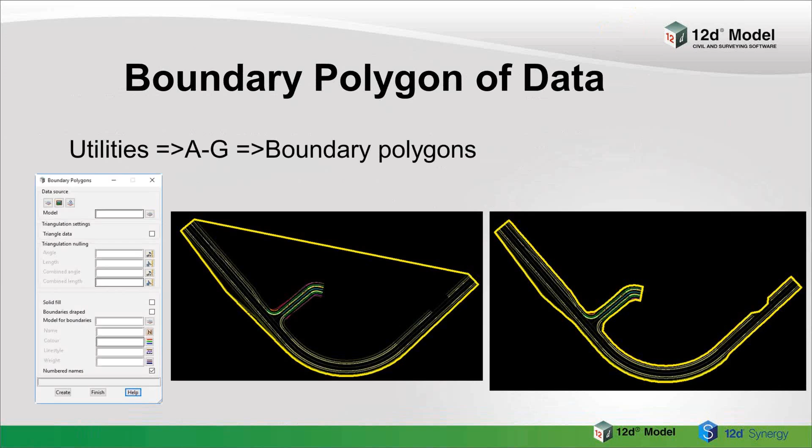A very important thing with high resolution screens and tablets is being able to blow up your icons so they're much larger. Out in the field, you want them so you can hit them with your finger, because if they're too small, you can't differentiate. But the problem on high resolution, like 4K monitors, is everything then is much, much smaller, so you might not be able to see or read it.

We've set these things separately, so you can blow up the icons on your views separately to the icons in toolbars, and we can also blow up the icons and text on your panels. So they're independent, because some of you may want larger, but maybe not all of them. Now you can make settings, so there's an example there on the views, and they can be totally independent to say things on the CAD toolbar.

With dimensions and leaders, which were introduced in version 11, you can now have overrides, so you don't have to make lots of different styles. For a given style you've defined, there are various things in it, and you can then say override, maybe the color of something, maybe the text used in it. So you can use the one style, but apply these overrides, instead of needing a totally new style. These can be set on menus and toolbars with overrides, which will make it much easier in terms of how many styles you need for dimensions and leaders.

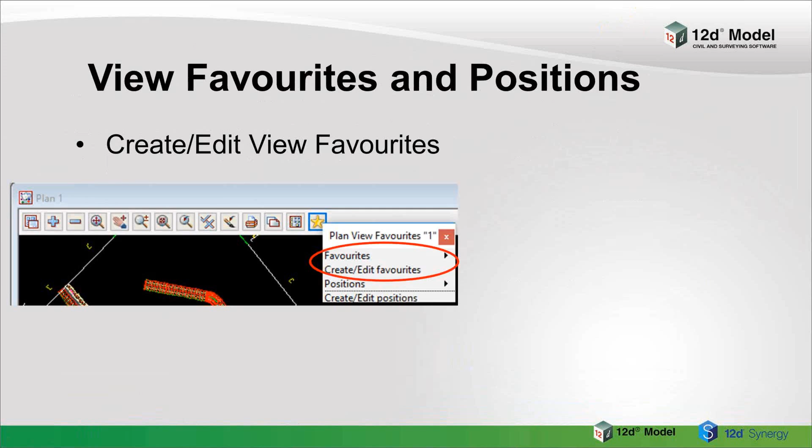A small thing I'll mention here is something we call view favorites and view positions, which I think you'll find very handy. You'll see a little yellow star now in version 12 on all your views, and if you click on that, it'll come up with favorites and create edit favorites. If you pick on it, it actually comes up with the same information that you have when you look at all the settings on your view.

You'll see little ticks on the left-hand side. You can tick them on so these will be used, or if it's ticked off, they'll be ignored. You can take all these values and write them away to a file, which we call a view favorites file. There's a different one for plan views, section views, and perspective views, because they're all different types of information, but the plan and the plan OpenGL share the same one, and similarly the perspective OpenGL share the same one.

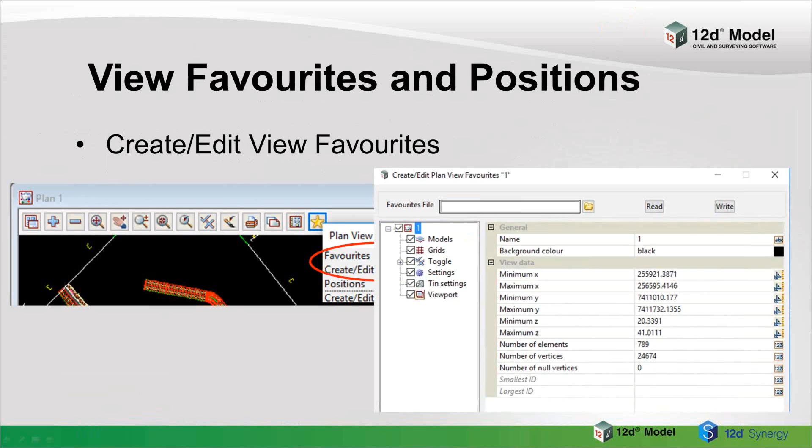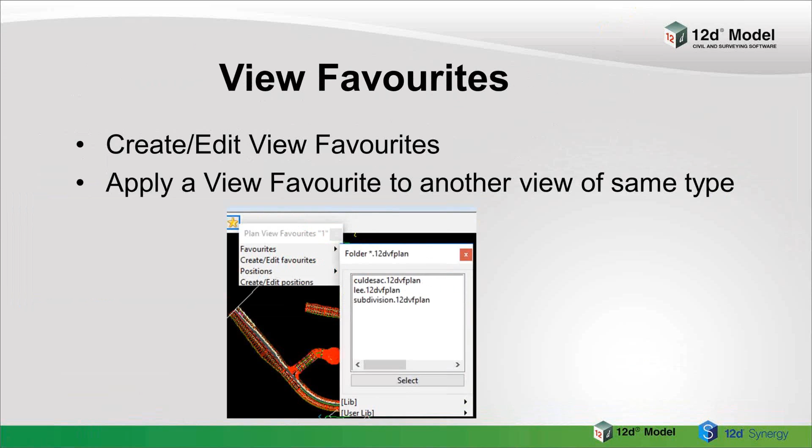Once this has been written away, you can then apply it to another view. You pop up the list, and when you apply it to the view, it'll add all those models or settings to that view. You're also able to say use them when you create a new view, and there's a list of models to add and remove—you can say remove them first before adding new ones, so there's quite a bit of flexibility. If it's a new view, you don't have to remove any models, but it takes all the others on, so you can create a new view straight away and give it the information.

You just feed it a new plan view and give it the favorites file. So all your settings that you ever want can be set up first in the favorites file, then applied to a new view or an existing view. When you create a new view in a chain, you can also use the favorites there, and similarly when creating a new view in a macro, you can give it a favorites file. So basically you can set all these things up with your favorites to get things exactly how you want them.

In fact, when a new project starts up, there's a file that's run which runs macros and chains. If you had all the new views you wanted, you could have them in there with the favorites, so they'll come back exactly as you want, and you don't have to sit there toggling things on and off. You also can use them in plot frames—a plot frame can now have all information that wasn't stored before saved in a favorite, so you can plot a plot frame without having to have a view. Those can be made and put in a chain, just like with long sections and cross-section plots, where you could run those without having to do anything—you could just run them. So you'll be able to do the same with plot frames.

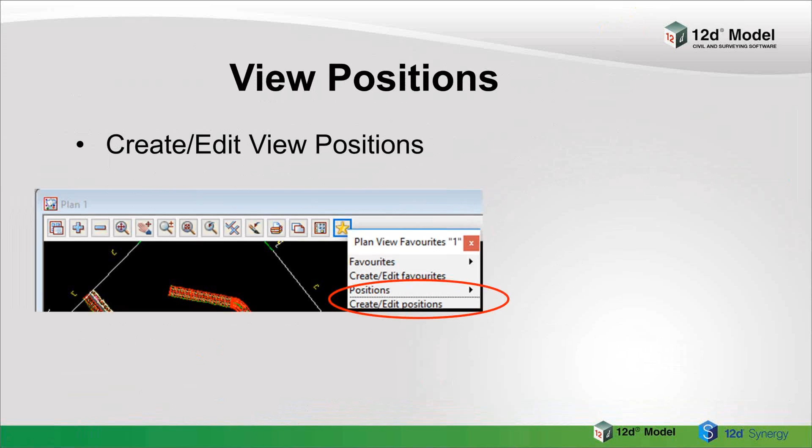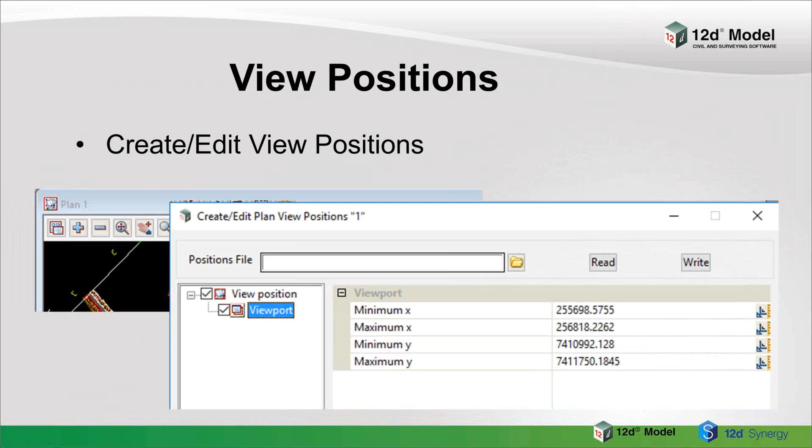Once you've got them, they have this viewport information, and you can apply it to an existing view of the same type. Very simple to do - you can just click one you've got there, and that'll zoom in, or however the settings were for viewing that view. Very good in perspective views, where you can have lots of different eyes and targets you're looking for.

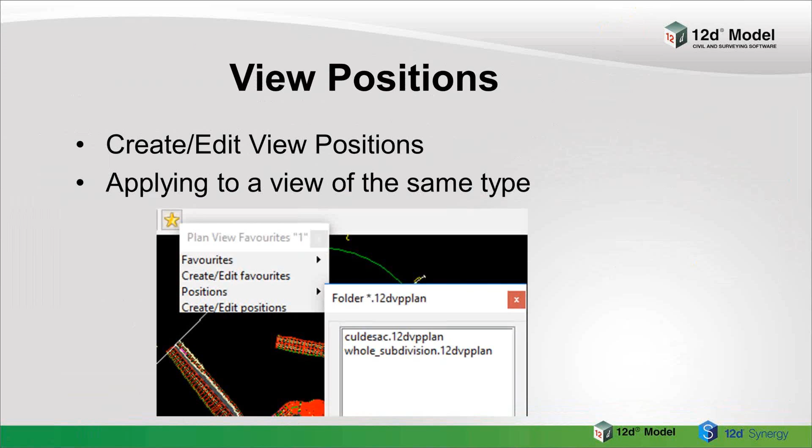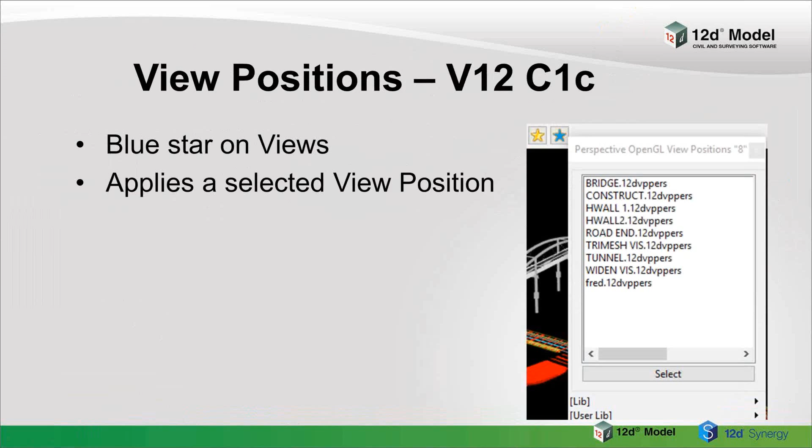Now in version 12, actually it's in C1c, there's going to be a blue star on there as well on views. So you not only have the favorites, which is the yellow star, there's also a blue star. What that does is give you a list of view positions, so it's nice and quick. If you've got your view positions set up, you just click on that blue star and pick one from the list, and it'll take you to that position.

The attribute manipulator - this is something that was going to be only in 12, but we brought it out early in V11 C1H and above. Not everything - we've extended it quite a bit for version 12 - but people were needing to do a lot of attribute manipulation for BIM and other things earlier on.

So basically in 12 it works with string, vertex, segment, and segment attributes and properties. You can do things like take your segment properties and map them back to string properties, because a lot of systems can't have vertex and segment attributes. So what you can do is say take something on vertex 3 and map it, and you might give it a name with a 3 in it. You can do that automatically so you know which vertex it came from, and the same with the segment. So it gives you a way of getting that information onto a string where a lot of other systems do not have vertex and segment attributes.

And you can come the other way - backwards. You can come from that information on string attributes and turn them into vertex and segment attributes. There's a lot more properties and things - string properties like areas, length, 2D length, 3D length - those have been extended quite a bit. Information you can get from your strings and turn them into attributes, which you may want to use somewhere else or with another package.

So if you haven't used the attribute manipulator, it's a fantastic thing. It also now works with model and project attributes, so they can be used as well, because it's a two-way thing too. You can take information, make string and vertex and segment and properties out of it, and go the opposite direction. So it can create, delete, and manipulate attributes and properties.

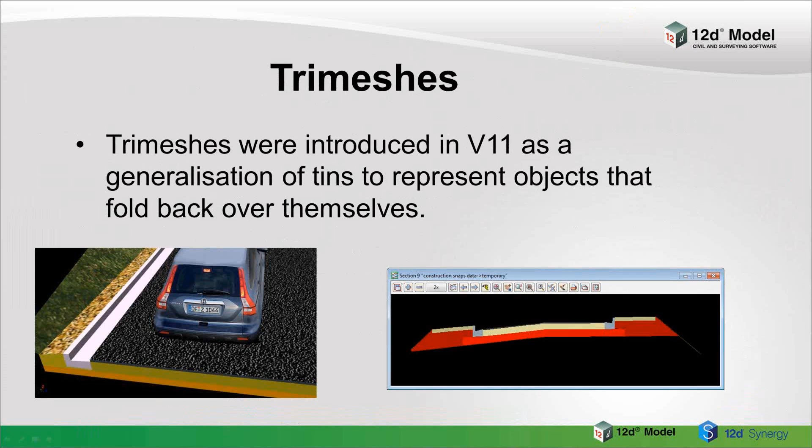And when you cut through these, you then see them as solids. So that's what Trimeshes were about. They were in version 11, but we just kept adding new things for version 12.

So the colors, a lot of things now that weren't working for them work. The color box, you convert Trimeshes, they can keep the string attributes of the things that had it. The global delete and rename now work for Trimeshes.

Helmert transformation works on Trimeshes, the 2D and 3D, because what happens, you often get data that's come in from another system as Trimeshes, and they'll be in some strange 0-0 coordinate system. By using the 3D Helmert, which basically is a rotation and a translation in 3D, you can then place it where it should be in proper, say, MGA coordinates.

So if you don't realize, Helmerts are basically how you take information as a 2D and a 3D. It'll scale, rotate, translate, to take information really from one coordinate system into the one that you want.

You can set now the colors of individual triangles in the Trimesh, and you can have vertex and segment information in the Trimesh. A lot of people don't have this information. When we do an apply menu and we create a Trimesh, we actually can give the edges that have come from strings the names of those strings. And also we can put information on the vertices.

So when people take it out to the field to set out with 12D field, they can pick things in the Trimesh. You can pick a string to set out from the Trimesh. You don't have to have the strings as well. So it has all that information in one neat package.

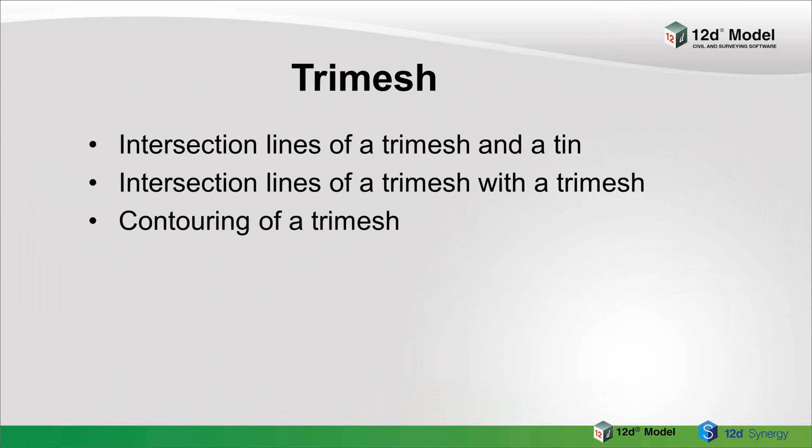So again, we keep adding extra things in for you, and people can make up Trimeshes from what we call planar polygons. A planar polygon is just a polygon with not many sides. It has to be a simple one - it can't cross over itself, it can't have duplicate sides and things like that. So it's a simple polygon, but it's in the plane, meaning all the values lie in the one plane.

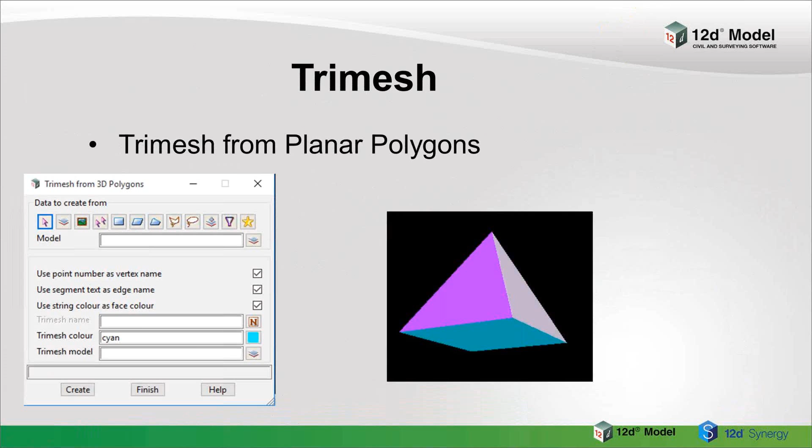And if you basically have a number of these things that match up the various edges, you can use the Trimesh from 3D polygons, and it'll create a Trimesh for you from it. In the same example here, you can even keep the colors of the various polygons. In this case, it's got a purple face because that particular planar polygon was that color, and the cyan one is the base. Very useful for building up Trimeshes from other data.

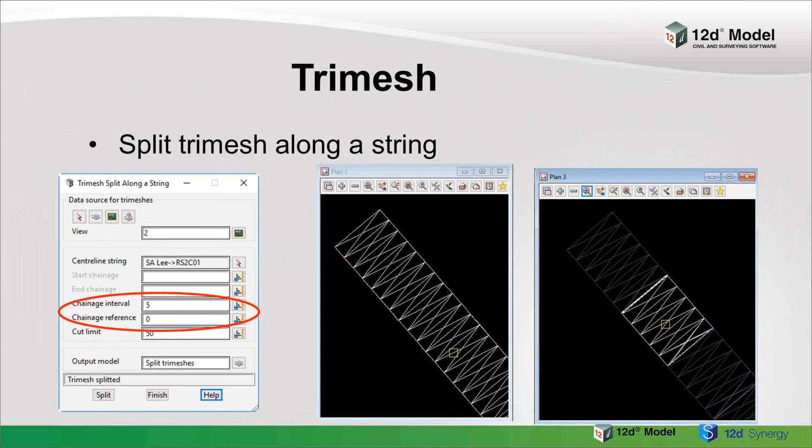You can split a Trimesh along a string. What this is all about - you've got a long Trimesh, it might be a road that goes for a couple of kilometres in pavement, and what this will do is you can then break it up. We do get some people in BIM systems asking, yes, we've got the pavement, but we want to break it up into 100-metre lots. So it's quite easy to do - it just splits it for you into individual Trimeshes. Very, very handy option, very hard to do in most other packages.

So Trimeshes are now a fundamental part of 12d Model, and you'll see this was a slide from the conference. We saw them used all through the conference in snippets and all sorts of places. So you'll see in a lot of our videos that we're always producing Trimeshes.

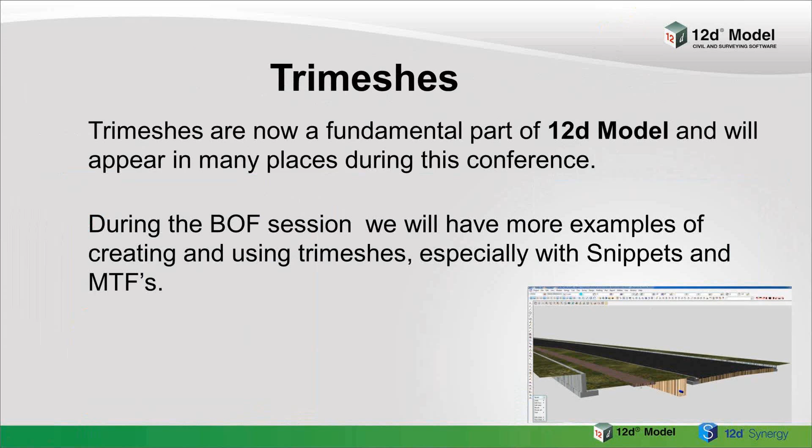The other big thing that's happened is this BIM, which, as I mentioned before, at the beginning of the year, it was a vagary. People said, oh, we want a BIM model. And you'd say, what do you mean? Most people had no idea - it was just some vagary, they've been told they need BIM. But it's stayed in now, and people are starting to read ahead.

BIM came into the UK, where it's mandated. A lot of people then were saying, oh well, we want a Revit file, we want a DGN or DWG. Well, if you read a bit further down in the UK system, that's exactly what they don't want for BIM. The whole idea about BIM is to use a format that's published so everybody can read and write it - getting away from vendors locking you into proprietary systems. So people are starting to realise that. As much as they're talking about BIM, they didn't read the next chapter of where the UK is going, saying you've got to have interoperability between different software vendors.

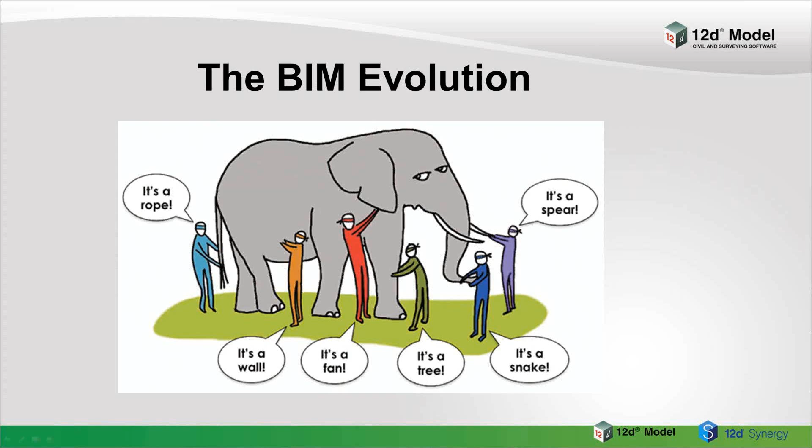So that's a good thing about BIM - people are finally understanding what it's all about. So that was all where it came from, being software vendor neutral, and you needed some sort of open format.

Strangely enough, 3D visualization was not always required. It was more the attributes and the metadata which a lot of people wanted. But in our world, with buildings and things, they seem to be concentrating on wanting the 3D representation. That's no problem, it's in there as well, but it's not necessarily what the end users are often after. And that's where the attribute manipulator comes in, to allow you to pass a lot of extra data across as attributes into your BIM data.

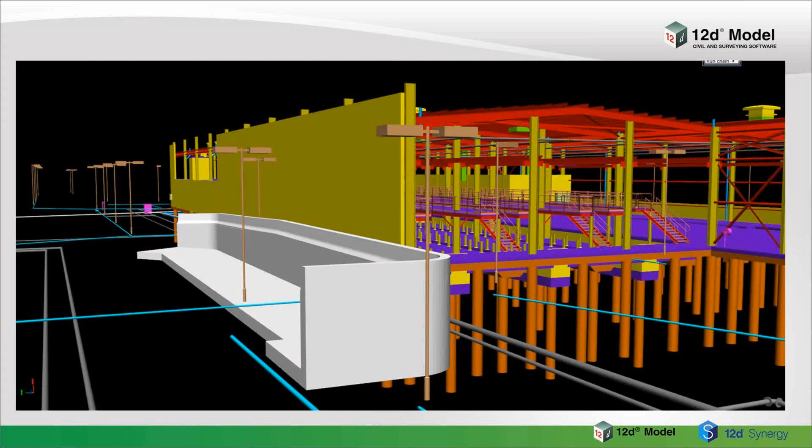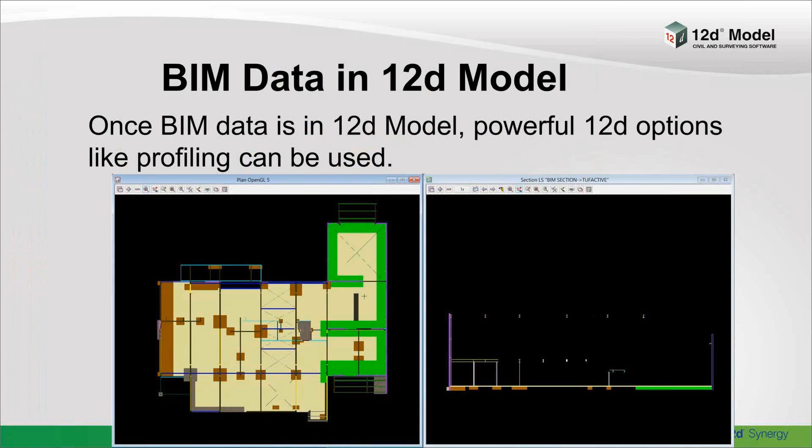And of course, once it's in there, you've got all your other 12D options, like there was the house, but we can then profile it - not just sections along a cross-section, but along the whole string, sectioning along a string, which a lot of packages can't do. So all our power, once the data is in 12D, we can use all our options on it.

So basically, we've now put a lot of these under a BIM menu. They're there in all sorts of guises, but they've now got them in one spot, and we left them in the other places as well. So you go to the BIM menu to find them. We can import, we can export, do all sorts of things with it.

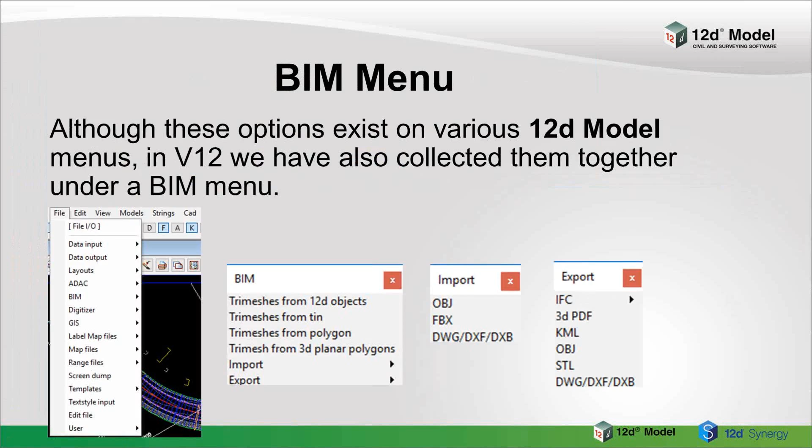So now people are realising the whole idea about BIM is you'll be able to model your designs using 3D solids if you're going to have a visualisation, and that's why we introduced trimeshes. So you could do that for all the information that goes with a road, say. You want to be able to inspect the designs in 3D. You want to be able to store and process the metadata or attributes associated with those 3D solids. Hence, we can do attributes to tins, we can do attributes to trimeshes, and use the attribute manipulator to get them the correct shape.

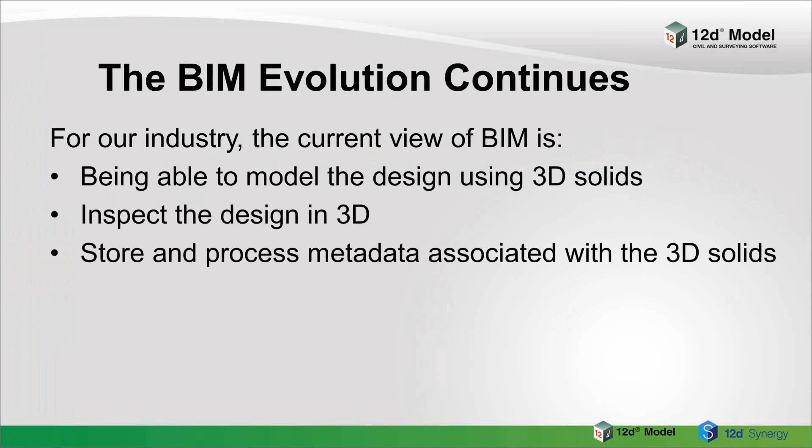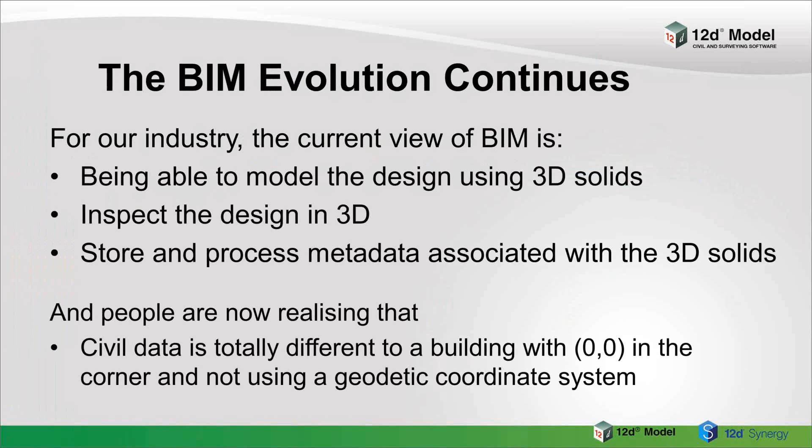And people are now realising that civil data, and this has been the big thing over the years, is totally different to some building, which often is 0,0 in the corner and doesn't even use a geodetic coordinate system. So civil data is long and linear, where buildings tend to go vertical. So it's a totally different world. Our data changes every millimetre, whereas a building, you might have 1,000 chairs, but they're the same chair, or windows, 1,000 windows. Whereas a road changes every millimetre. So they are different - civil BIM is totally different to a vertical building.

And the challenges of civil BIM is it needs to be large scale, and you need to have a map projection, otherwise your data's not going to fit. They're going to be large coordinates, going to be MGA, not somewhere around 0,0. So you've got to be able to handle double precision coordinates.

And you have to be able to model your design with 3D solids. You need to be able to look at the data in 3D, and you've got to be able to store and process all that metadata with it. And you need some sort of open standard to write the data around.

Now, with IFCs, which is for Open BIM as it's called, it has IFCs as the method of getting data across. But the civil IFCs don't exist. We're working, though, with the international committees - I'm involved with the alignment IFC committee, also with the roads committee, the rail, the tunnels, and the bridges. And at the moment, we're working on just the alignment - there's not even alignment in there at the moment, and we're working through that at the moment. So we'll be working on those with the IFC standards so civil data can really be moved around properly.

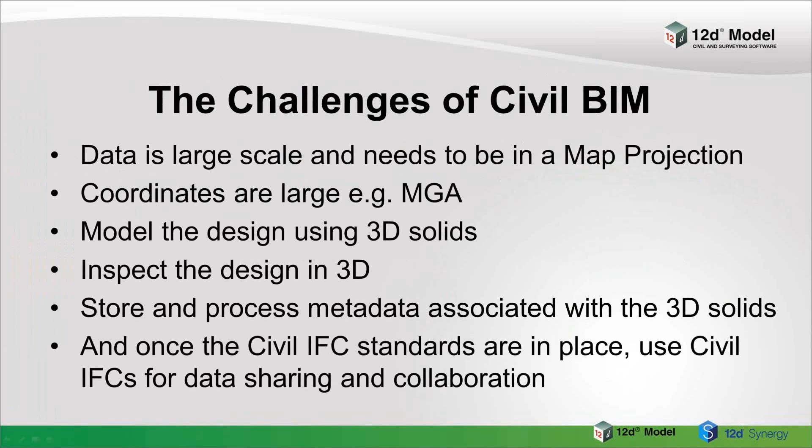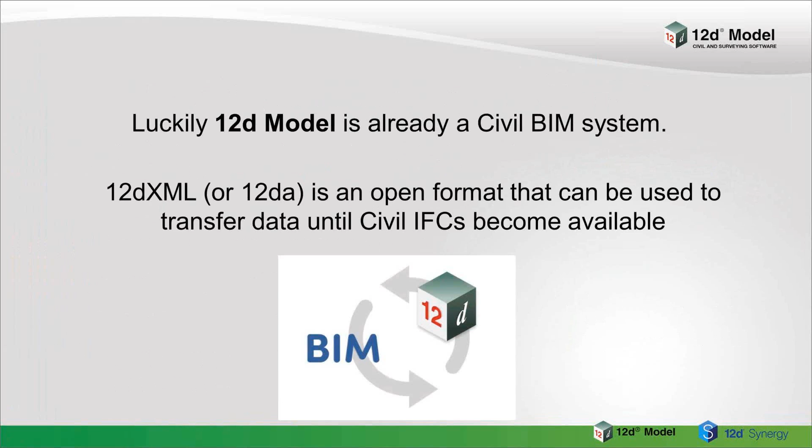And luckily, 12D Model is already a civil BIM system. Everything there we do already, and we have a format, 12D XML. It's published, anyone can use it. It's not a binary, proprietary, lockdown thing - anyone can read and write it, which gives you a method of transferring civil data until civil IFCs do become available. So you've already got it there right with you, a civil BIM system.

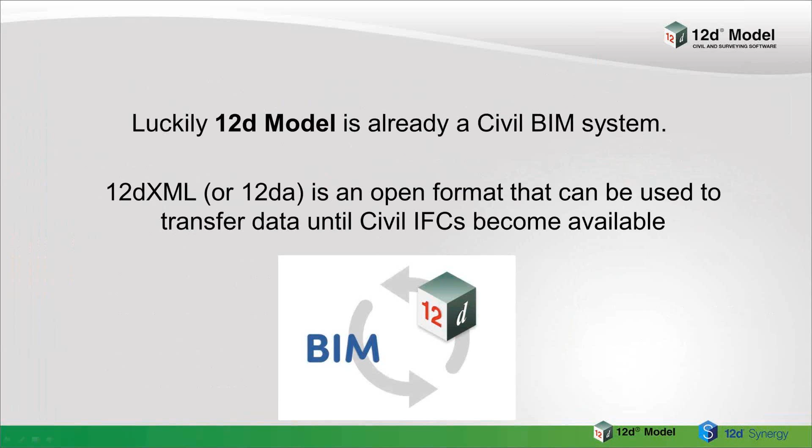Another one that people are using a lot in Queensland and spreading throughout Australasia is ADAC.

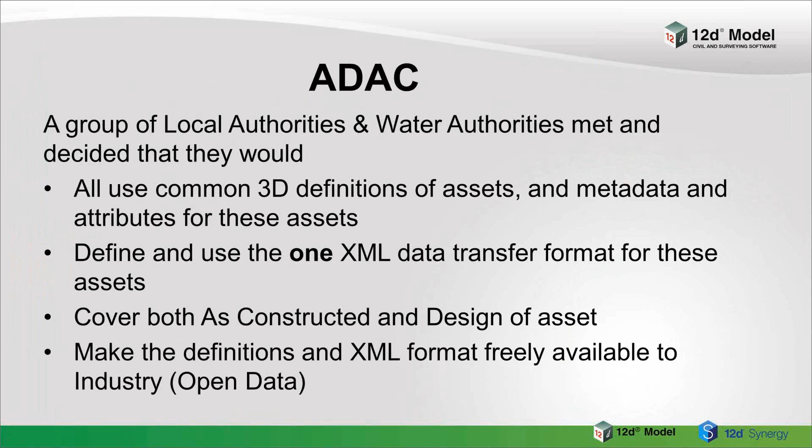A number of authorities got together, which is great in itself, to come up with common definitions of assets, the metadata and attributes that go with them. It's important that these people define what everything's going to be called, what your attributes are going to be called, exactly what they are, rather than just being given some data to make something out of. They're going to use one XML data transfer format, so there's a published format everybody knows how to read and write. It covers both constructed and designed assets, and it's all freely available to industry, so it can be open.

Luckily the consortium got together and provided a schema for their XML, which makes it easier to read, along with guidelines about what those assets are. That's the sort of thing people have to do for any BIM, IFCs included. If someone's asking for a file in BIM, they need to tell you exactly how everything's modelled - there are 10 different ways you might do a pipe or a pit attribute. Whoever's asking for the BIM data should specify that right down so you know exactly what they're wanting in their files, and they should be in IFC files.

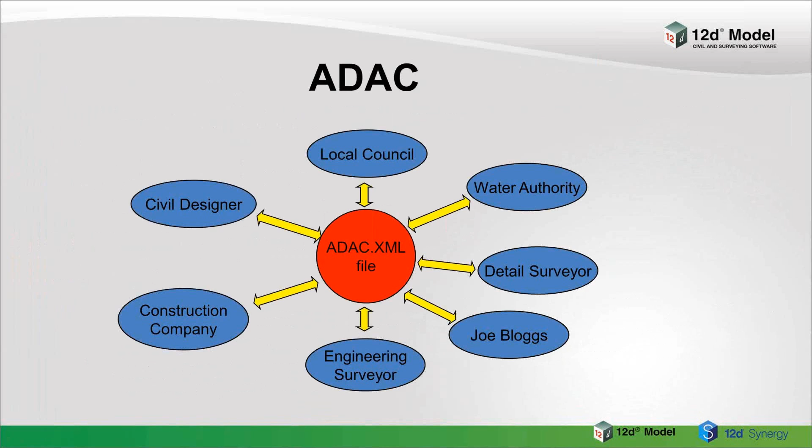Luckily each of the authorities does exactly that - they provide you with local guidelines to say exactly what they want and what they don't want, with all pictures of it. That's how a real BIM system is done - not just saying 'I want BIM data', you have to give all these definitions so everybody's on the same page. So with this, anyone who can read and write an ADAC XML file can pass it around between anyone else who can with any other software. It's fantastic, exactly what a BIM's all about.

So it is a civil BIM system. It's controlled by the IPWEA, which is the Public Works Engineers in Australasia, and they've got an independent format that anyone can read and write. The major vendors support it - 12d Model does, you can read it with FME, which can get you into most packages and places like Esri, MapInfo. It is a BIM system, so it's a fantastic example. If a council somewhere starts using ADAC, they're really way down the road for using a BIM system.

They've come to realise that it's the data, that digital data, that's important, not your plots - those are all generated totally separately. So you want this proper 3D civil digital engineering data and get all your processes working for that. If another format comes down the future, like IFCs, that can replace ADAC, that's going to be simple because they've got all their processes now working properly. Changing to a slightly different open format is not the hard part - it's changing all their processes so they're using digital engineering and data rather than getting away from drawings and things.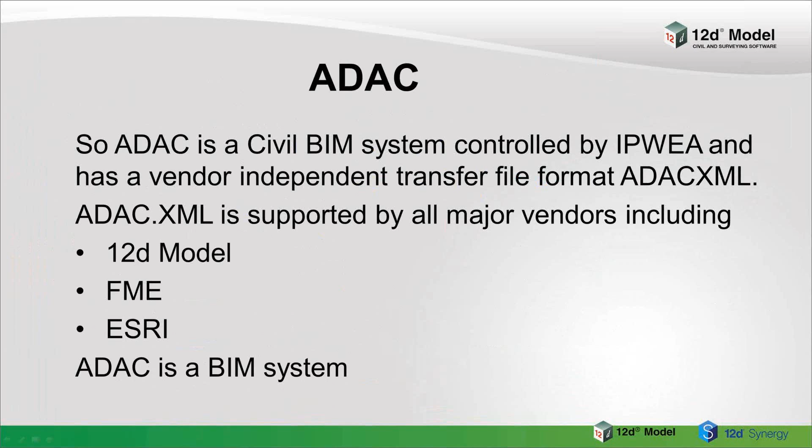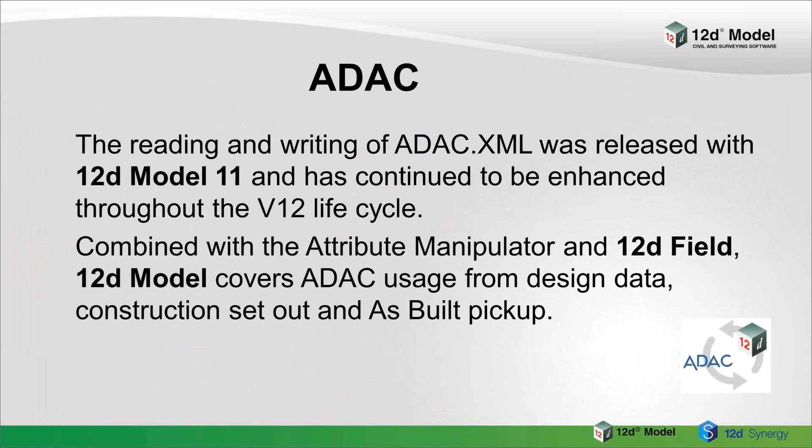So we've been working with ADAC. We released it with version 11, but continued to improve it in version 12. With the attribute manipulator and 12D Field, we cover both sides of it - you can take data from design data, set out with it, and do as-built pickups. We'll keep doing that and looking at producing drawings automatically from that 3D ADAC data, so the drawing side just becomes a push of a button, and the real data, the source of truth, is your 3D ADAC data, not a drawing. We support ADAC 4.0, 4.1, and 4.2 was recently released, supported in both version 11 and version 12.

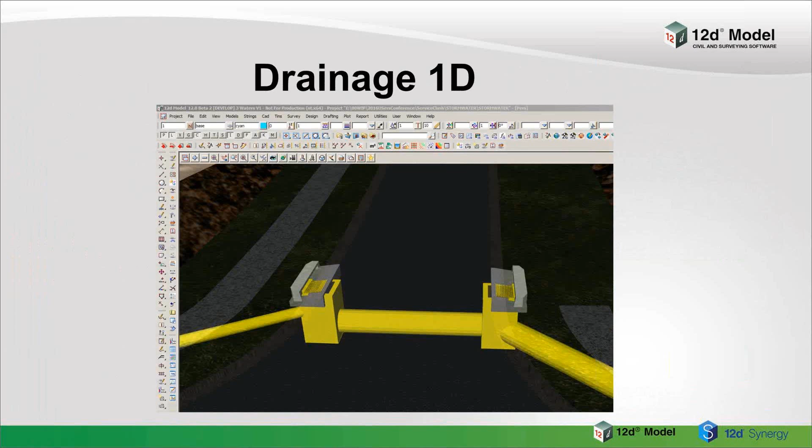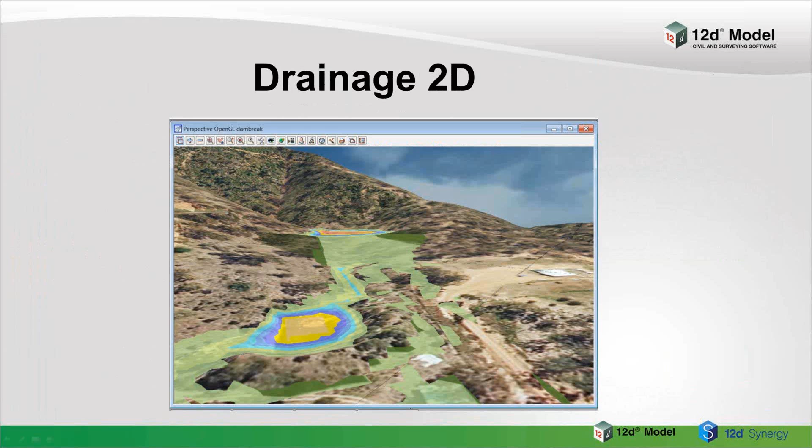We've done a lot of extra things for the drainage 1D side in version 12, and you'll see that in the what's new. We've also done a lot of work in drainage on the 2D side, using our TUFLOW engine in the background, so you can see how the water's going on the surface without having to do anything more than just provide your tin. That's again a lot of new things done in there. But we've also brought in a brand new module called Dynamic Water Supply.

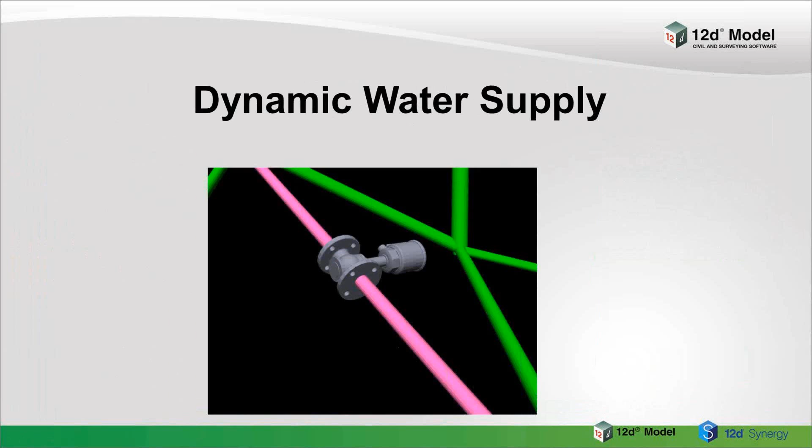So this is the third water module we didn't have before. It's a new module, basically the hydraulic analysis and water quality for pressurized pipe networks. It's the one thing that was missing, which is water under pressure.

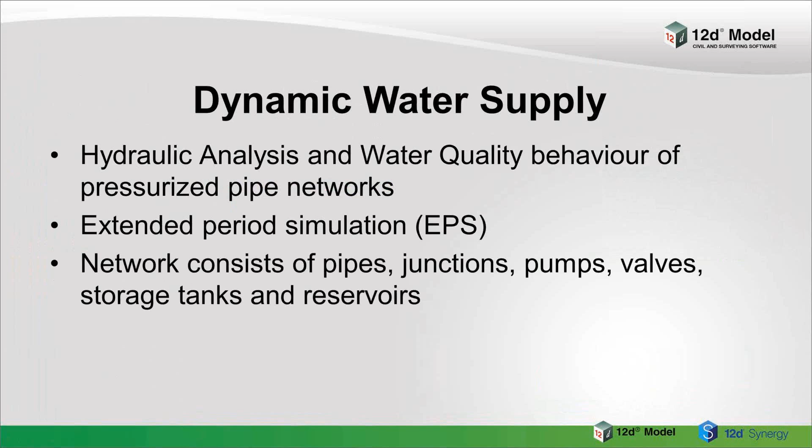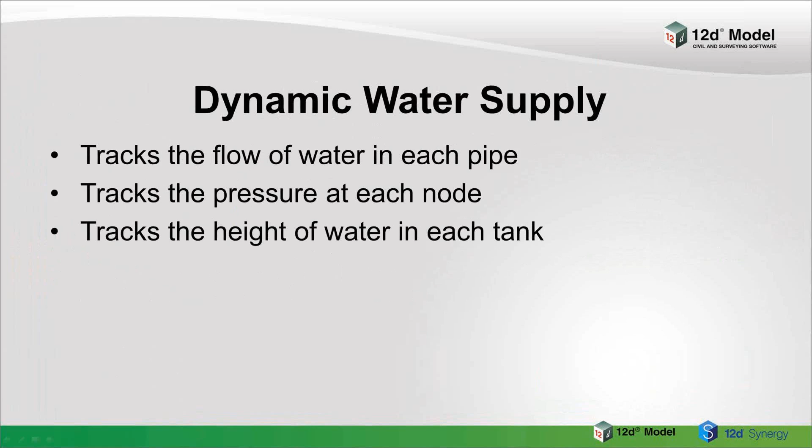You can simulate it with pipes, junctions, pumps, valves, storage tanks, reservoirs, and so on. It tracks the flow of water in each pipe, the pressure at each node, the height of water in each tank, and the concentration of a chemical species.

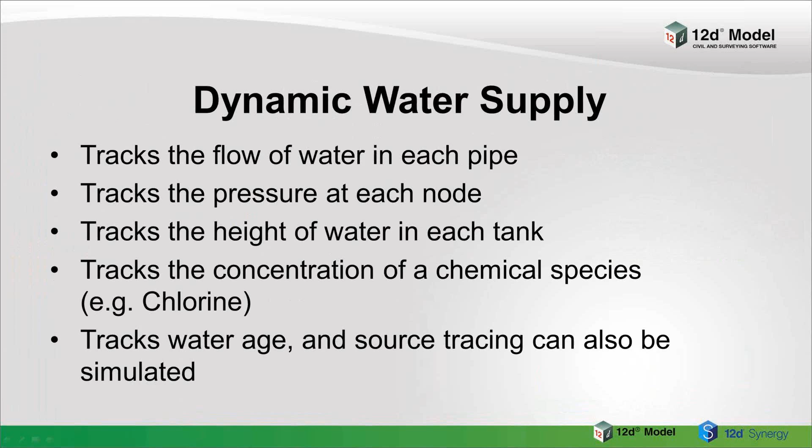Like chlorine, so all those sorts of things you need, water age, and so on. That's what it's all about, doing water through maybe thousands of pipes. You get lots of graphs out, just like with dynamic drainage analysis, to show all this information. So that's a new module that's come in with version 12.

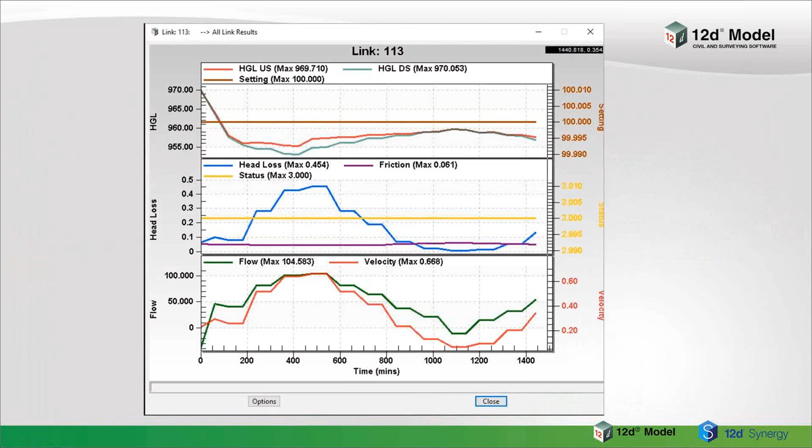So the problem with point clouds is how do you get sensible data out of it. People asked me at a conference recently, when I was on a committee out front, where will surveying be in 10 years' time? My reply was, in 10 years' time we'll never be talking about point clouds.

Yes, they'll be used to pick up the data rather than surveyors going out physically doing it, but then the point cloud people who produce these things with their pickup machines will give you not a billion points, but a table as a 3D object. They'll give you a sign there with some text on it and stuff like that.

It's only now in the interim that we're getting millions of points, because people want the edges of the roads, they want the line marking, they want them as strings. But that's all happening, and bit by bit there are more and more things out there to do it for you. So yes, point clouds will be used to pick up the data, but most people don't want a billion points - they want physical data they can use, and that is coming bit by bit.

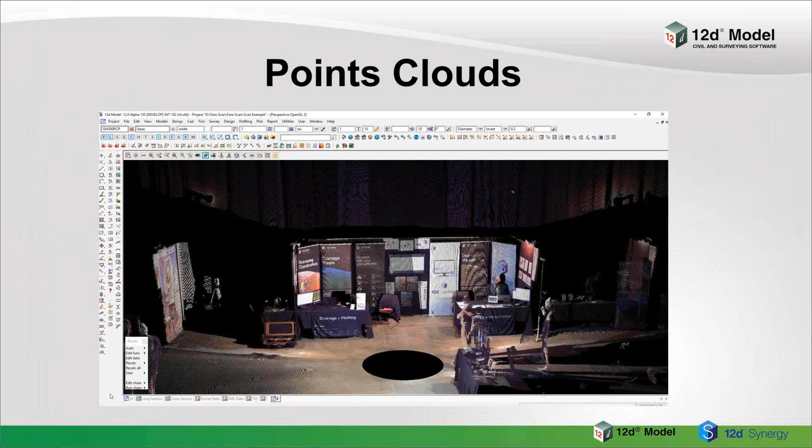But we do work with point clouds. I must admit I've only seen jobs up to about 3 billion points, but they're there.

We have our point cloud import and we continue to add different formats. You've got things like E57, which is an industry standard, and also the LAS format, which most people use. We've also got converters from various formats into our internal point cloud format. So there's more and more of these - lots of new point cloud formats to read things in, including GeoTIFF DEM point cloud formats.

And there's a lot for management with categories and looking at information by categories. Categories are in the LAS files, so you can have some of the data categorized like terrain or trees or whatever, and we can turn that data on and off by categories.

You can delete point cloud data by, say, here's a tin, all the data within that area I want deleted. So there's a lot of extra things for us to clean up point clouds. You can also undelete them - they're like a tin where the points are still in the point cloud, but you just don't see them. It's like nulling triangles - you can do the same thing with these point clouds. So basically, categories give lots of options to do things with.

As an example of these categories, you say which ones you want to see or don't see, so when you're triangulating things, you only use some of it. We can set categories in various methods - if they don't already have categories, you can use a tin to try and set some of them. You can also undelete and delete points.

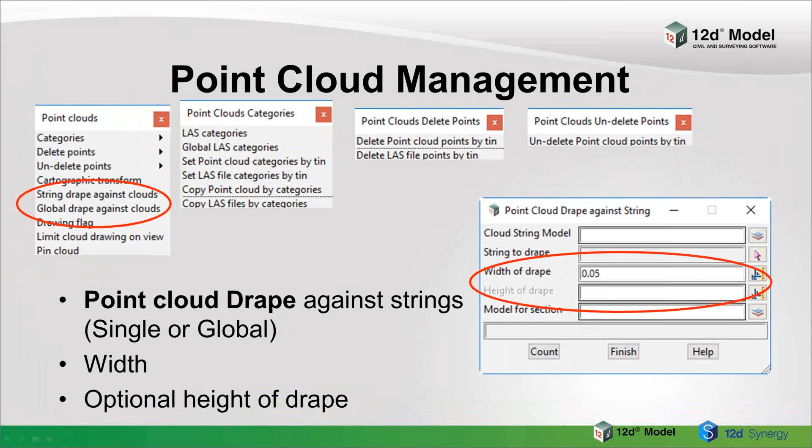So that's pulling data out by width and height. This is where, when you've got a huge point cloud, you may have something like an alignment string, and you just want to pull out data that's in a box. This is a great way of cleaning up data, because you have this point cloud, and you know your pavement should be a certain distance above and below your alignment string. So by putting this filter through and picking out the box, you get rid of all data that's too high or too low, that's of no use in case you want to triangulate the data.

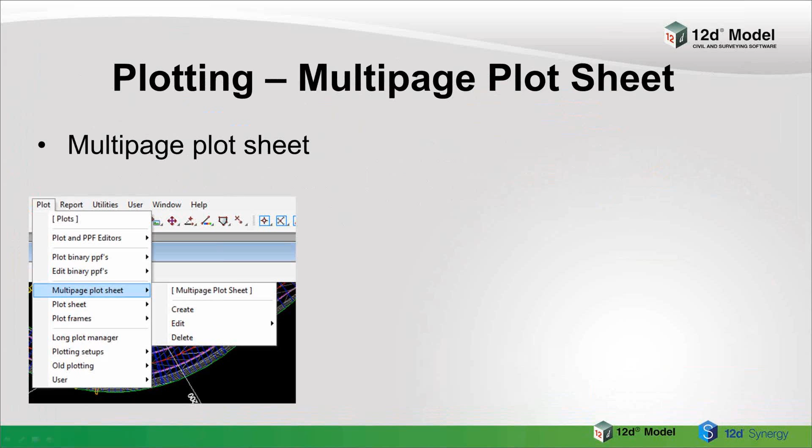Another one, the final sort of thing I'm mentioning here, is the multi-page plot sheet. This is an extension of the plot sheet that was in version 11. In this case it's not just one page, you can actually have it made up of lots of sheets. So you can make up a sheet set, and then plot to a PDF, all of them into the one PDF file, say. It's got both cross sections and long sections available in there, so you can pick individual cross sections or parts of long sections, or as many as you like of basic plan views.

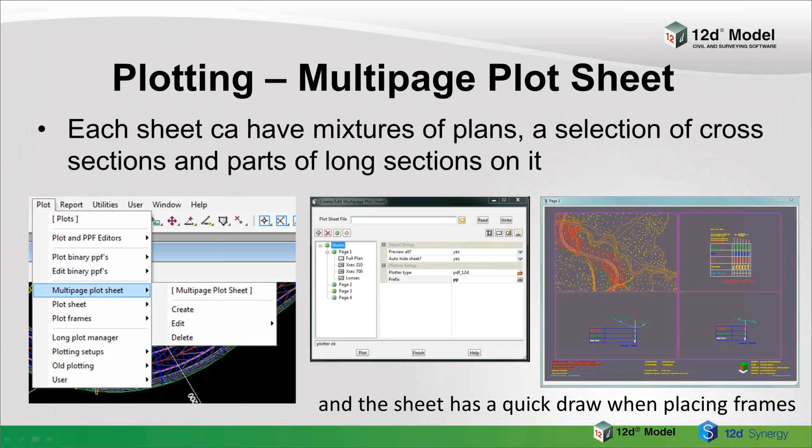When you actually do it, you've got a quick draw facility, so you can more or less see what's going to be in the thing before you plot it. That can also be turned off — if you've got huge models it might be slow, so you can optionally turn it on and off. And then you can plot selections of pages, or all the pages, of these things.

The other thing we found is a lot of people have PDF files as well, and you might have produced a number of them in the multi-page plot sheet, but we also added an option which allows you to take a whole list of PDFs and combine them into one PDF. So if you've got, say, 30 cross-section plots, you can make them into the one PDF file. You might have some things from the multi-page plot sheet, and also put in some cross-section plots and some long sections, to make one set in one PDF file. So it's very, very useful now — the PDF is becoming the major way people take information in drawings.

We've also added lots of things to the plot parameter files. I'm just going to flip through these quickly, but there's heaps of them — a lot of things people have been asking for over the years are now in there. With drainage, you can just pick one string out of a model to plot for the drainage side. With cuts, you can now put coordinates X, Y, X and Y, and Y and X. You can have both the internal and the external diameter for pits and pipes — before we just had the internal.

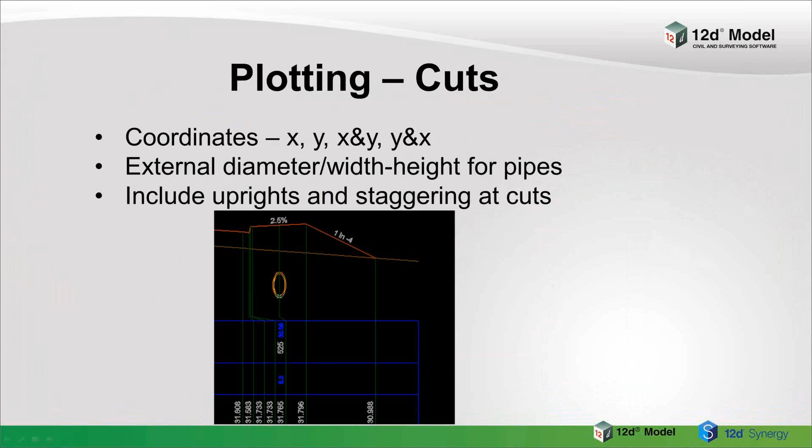When you've got uprights at cuts and things, what you can now do is stagger them. Before they only appeared exactly where the cut was, but now you can have them staggered, so it looks at the changes in the change box and staggers them accordingly. So if you move this information down to a box that's got staggering, it'll stagger as well. Here's an example — I've got two values on there from the cuts, the diameter by the look of it, and another position, possibly the offset, and they are now staggered. So that makes things that people have wanted to do for quite a while.

But you can have grids on long sections and cross sections and so on — they're there. You can label strings in corridors.

Where you've got a string in a corridor that projects back onto your profiled string, you can now put things like the chainage along and offsets for cross sections of those other strings, where they occur, and their heights. You can have the minimum and maximum heights for the whole string of things in the corridor, and put the diameters of round pipes or culverts in your model inside the corridor.

These are strings that aren't actually cut, but things that are in the corridor beside it. You can put coordinates from those things for a lot of these, and label the strings in that corridor with a string name, model name, and string and model attributes. So if you've got information that's not cutting but you want it labeled in some way, there are a lot of extra options. You can also put symbols on it. There's a lot of power in there.

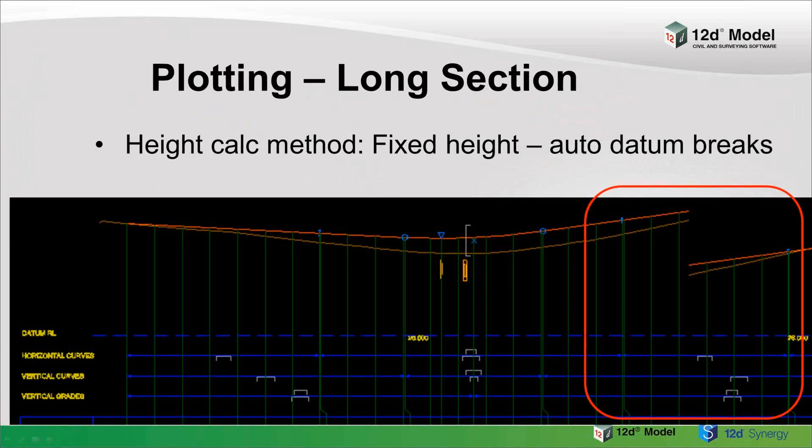One thing we introduced for the long section is that you can now say you just want the plot to be a fixed height so it doesn't go out the top of the sheet, and you'll get auto datum breaks. It'll automatically work those out for you, so you don't have to do anything at all. You just specify a height and the total height for the plotting area, and when it goes outside that, it'll put in datum breaks.

With the uprights on cross sections, before we could only have them where there was a primary string, which if you had natural surface cross sections, you're going to get lots of them in lots of places. You can now give a user-defined interval, and you can even turn off the primary string ones. So there's a lot of extra things you can do there.

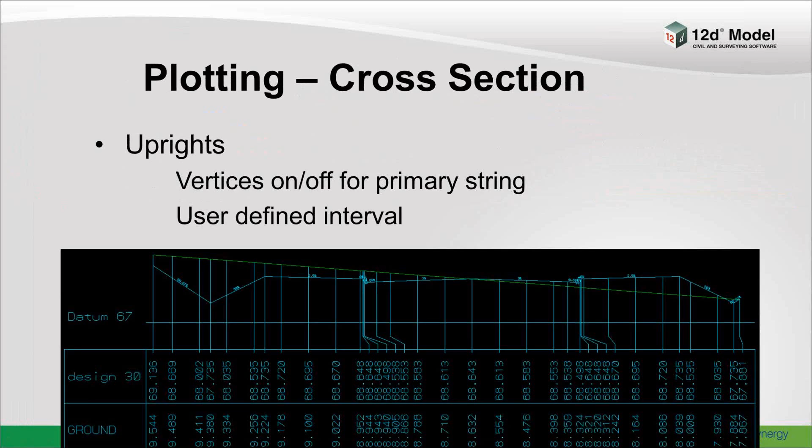In this case, we've got a combination where we've got the ones from the cross section itself, but also at regular intervals. If you just had a tin being profiled, you'd probably just want a regular interval. That's something a lot of people have wanted for a while. As I say, you can just choose - here I've turned off my primary ones and I've just got my regular interval, but all combinations are available.

You can plot the start and end of the primary string because it might fit in with either of those sorts of things, and you can also plot out in the extension area - outside your primary string. So where you're extended left and right a little bit, you can start putting uprights there as well, and these would have to be the regular ones because there's no string out there that you're profiling. So all those sorts of things are available now.

In this plot here, you'll see that outside the cyan primary string you're profiling, you can see some uprights going out to the left and right, right to the edge of the tin. That's going to make a lot of people's plotting of natural surfaces much, much more powerful. There's another example there, which is just doing regular intervals out in that area without the extension.

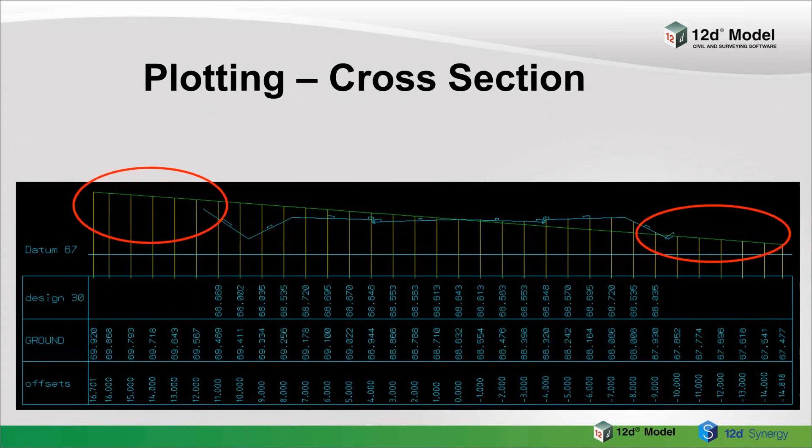For cross sections, you could also label values at the points across the cross section - you can give its name and other information, and you can now stagger those labels as well so they'll actually fit in. In this case here, I'm labeling the point names themselves, and I've got one that's being staggered down the bottom, so I've done a bit of both.

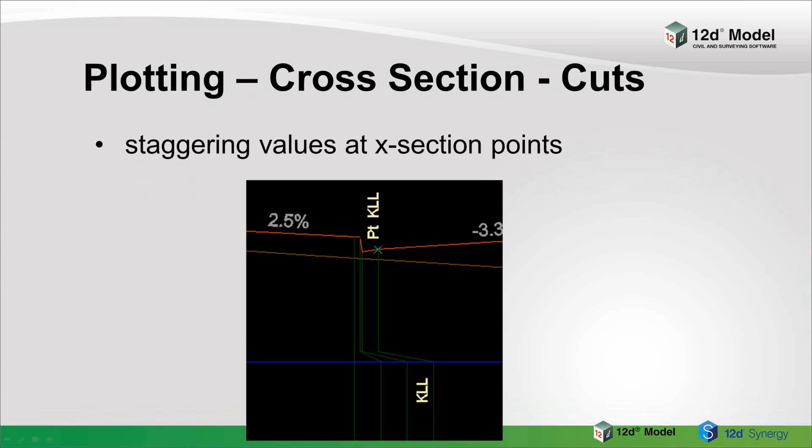ePlan. ePlan's been in New Zealand since about 2001. It basically means you don't have surveying plans as such anymore - you're giving the government the information in an XML file, so it's replacing the deposited plan. This XML data is all part of digital engineering. This is the next step for cadastral people to move into the world of digital engineering, and it's being introduced in Victoria, New South Wales, and Queensland. So it's starting to come in.

Its uptake is slow, but it'll start to accelerate like it did in New Zealand. We've been working with the governments - even though we've done it for 10 years in New Zealand, all three of our states here are totally different to each other and totally different to New Zealand. So we're working with each of them to try and get them working. So far we've had ePlans going for Queensland and New South Wales, and I think some people are now working on one for Victoria. So it's all there.

We'll continue to enhance that in version 12 and into the other versions, for those working with ePlan. So just get onto your reseller if you're interested in working with ePlan, because it'll be like New Zealand - it'll be compulsory down the path at some point.

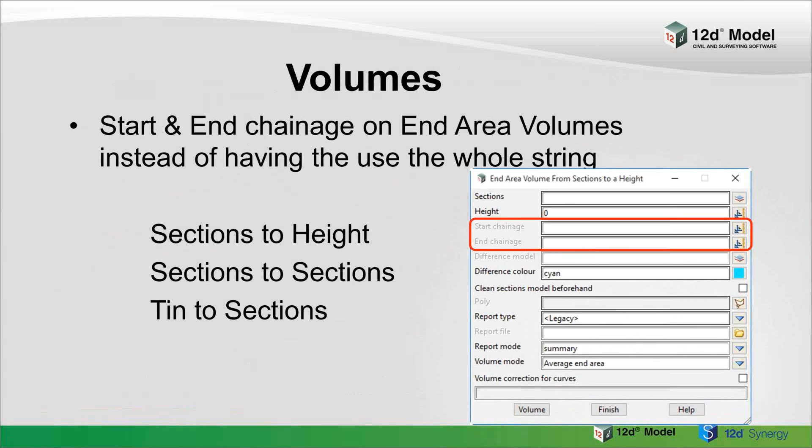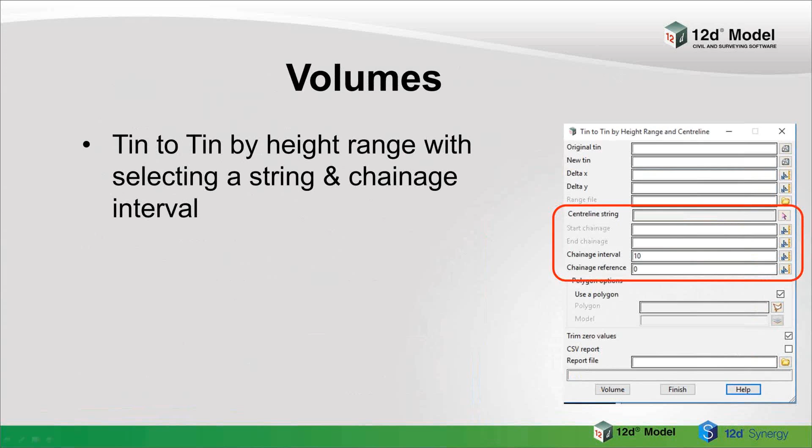With volumes, we've added a lot of areas where you can set start and end chainage, where before you could only do the volume for a whole string. So we've added a lot of extra options for sections to heights, sections to sections, tin to sections, so you don't have to do the whole string. We've also added height range, and for that we've allowed a start and end chainage and an interval when doing height range volumes. So a lot of these volume tools have been beefed up considerably.

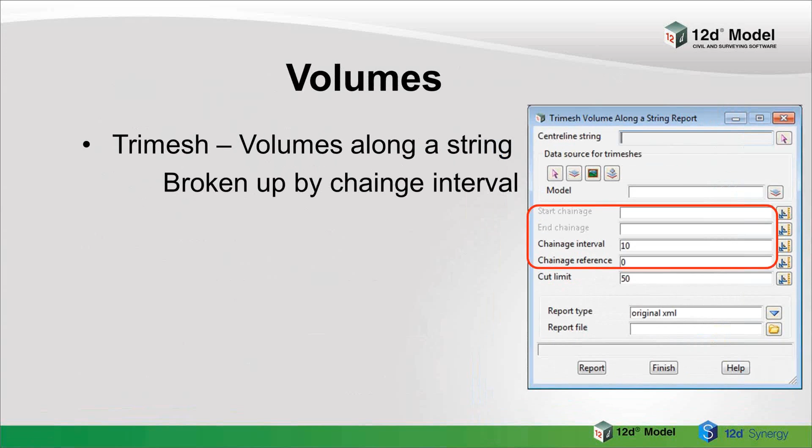With Trimeshes, in version 11 you could do volumes by area and then collect them in different ways. What we also added is you can now break it up by chainage interval, so you don't have to break the Trimesh up yourself - it just calculates it as though it was broken up. For chains, lots of extra things were added: plotting plot sheets, plotting multi-plan plot sheets, calculating extents.

Profiles on a section view, conditionals - is a Trimesh shared in, is a tin shared in, does a super alignment solve, does it apply MTF, is it valid - so you can check for those things and the chain can bail out saying there's an error here. A lot more of those sort of conditionals have been added.

And there's also a go-to - when you have a conditional that's going to go somewhere, you can get a pop-up of all the labels that you can go to. So it makes that much, much easier to do.

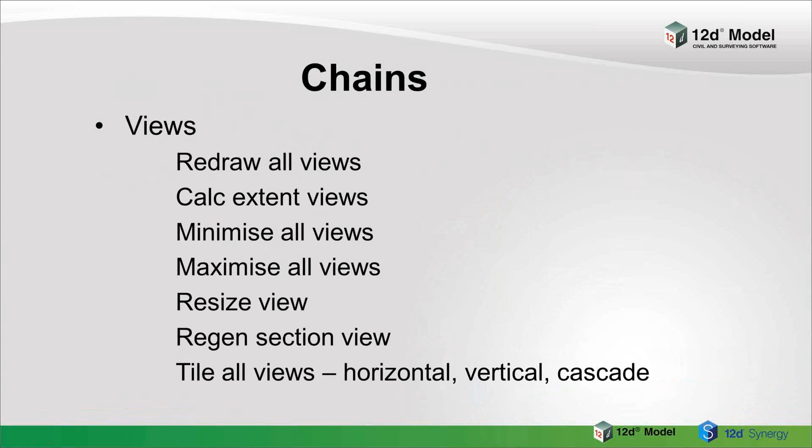Lots of things for redrawing views, calc extents, minimizing views, maximizing, resizing a view, regenerating a section view. You can tile all views. So again, it gives you incredible control in your chain over views.

When you create them, as I mentioned before, you can use a favorite file, so you can have all the settings there. You can also apply a favorite to a view because you've got that command for favorites, and that can be recorded in a chain. So you can not only create a view with a favorites file, but also apply a favorite to an existing view - a lot of power for you in your chain to do things.

You can play a wave file, so noise. You can compile chains so that way people can't fiddle with them. That's a nice little feature when you've got issues with a lot of people in your company, but you don't want them getting their little hands on them and playing with them.

Macro calls - yes, lots of new macro calls, just like the chains. We add them in as people need them, so if you're into macros, there's a heap of new ones in there for you. And with the macros, these have actually all been documented. We brought the macro manual up to date so that everything in it is now documented, and the PDF will contain everything you need - and if there isn't one, just let us know.

We've added in heaps of XML reports. What we did though, was do it in such a way that we could still have the original report - what we call the legacy reports - but then we have the XML file so you can start making your own customized reports. For all of them, we usually provide at least one decent HTML report, but you can then customize those to your heart's content or make up totally new ones. The existing ones are still there, so if you've got macros that use existing text reports, you can still produce them as your legacy reports.

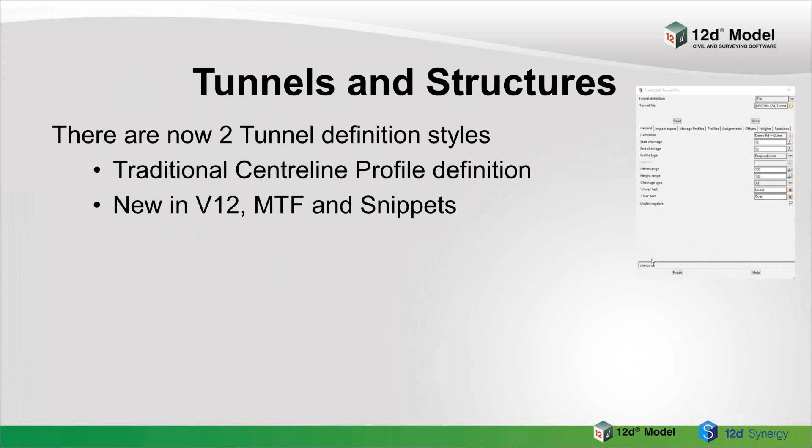With tunnels and structures, we've now got two definition styles. The traditional one we had in version 11 is a profile type, but now in version 12, your MTF and snippets can do all of those tunnel commands - you can widen, come in, do everything you could do like with the normal template for tunnels. So if you've got a tunnel profile, you can create a snippet from it to do it for you, making it easy if someone's just giving you a drawing of a tunnel profile to construct something to use in an MTF file.

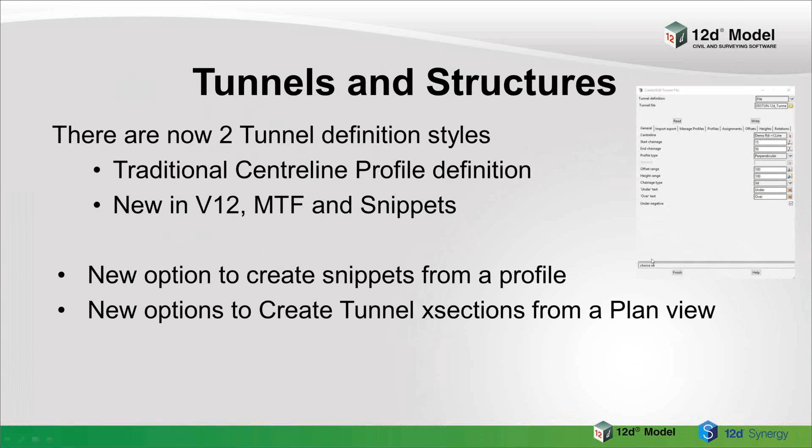So you'll find a lot of extra work in the tunnels and structures side as people move into digital engineering, because often we have to recreate this data since the people who designed it just don't have the capability that 12D model has.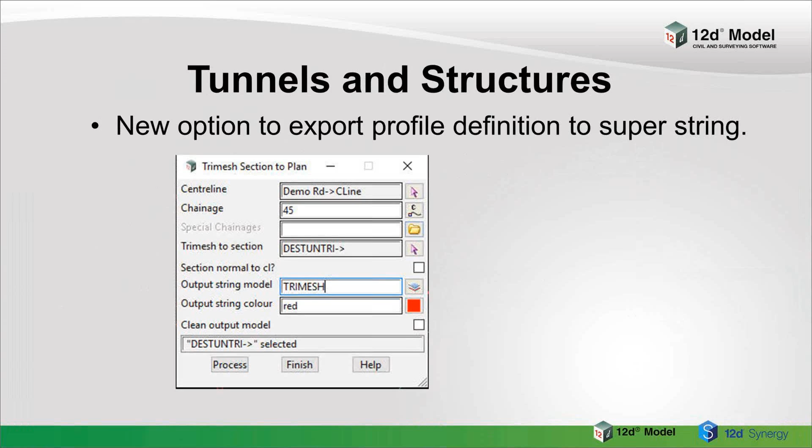For survey, we've got our standard 12D field pickup, 12D field set out, and we've also added 12D tunnel, which is a new module for version 12. I won't say too much about it because we'll see it in our examples - some of our customers are using it on big tunnels at the moment, and those videos will give you more of an idea of what's going on.

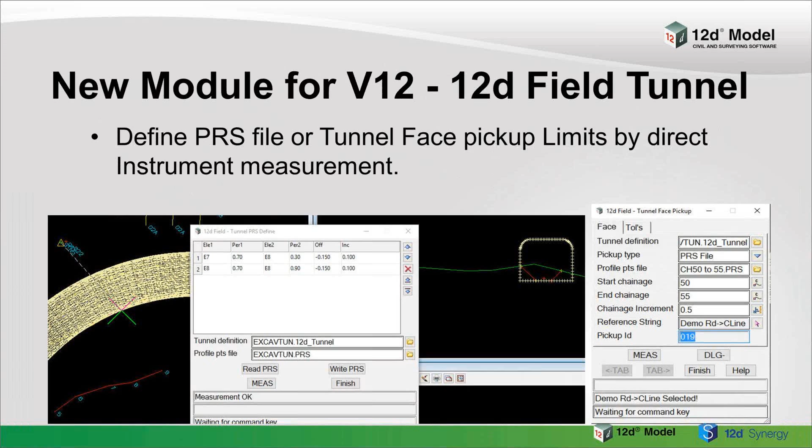This ties in a lot with your scanners - you can use a scanner out there and limit it from 12D to say what data you want and control your scanners. So in a lot of places it's replacing where people were using total stations - they now use scanners the same way and can take all the data inside 12D and work with it.

With pickup, you've got a lot more extra buttons and keys - you can make them larger and smaller and set them up so in the field they're much easier to use. We've also got an option that makes the calculations for your 12D field go much faster, because often you just want it processed rapidly in the field, so it can skip some other processing so you can see the results much faster as you're walking around.

There's a lot more user-defined commands, buttons and things to go with your pickup and set out. If you've been having trouble with those tablets out there with buttons and things, just talk to our people, because now you can virtually do everything you want and set it up so it's much easier to work on a small tablet out in the field.

For GPS, most units use the standard NMEA string, and we support them. We found a few variations on the theme from some vendors, and as they refine them, we try to work with them. So most GPS units are supported by 12D field.

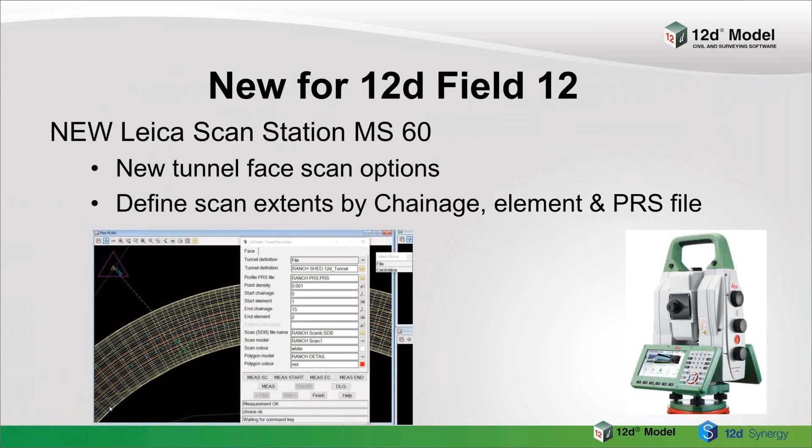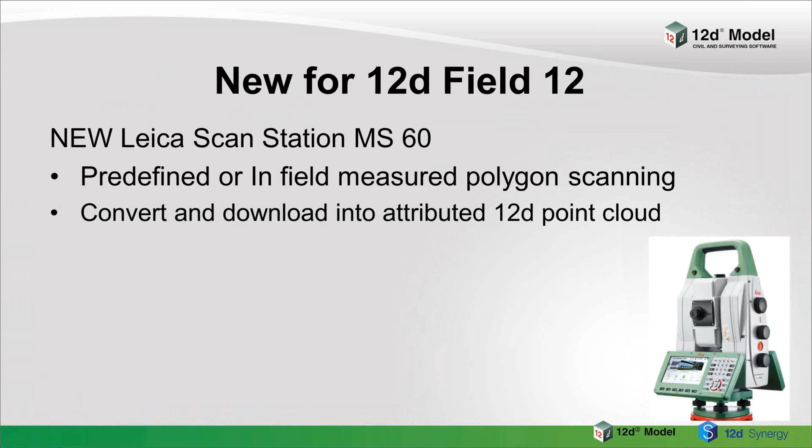So the MS60 has got a lot of support in there, but for all the other types of instruments, if we can support them, we do similar things. We can download, convert and bring the data from these into a 12D point cloud. So we can pull down the data from the scan station quite well.

And the other thing we've done for version 12 is there's a new Trimble connection, supplied by Trimble, which allows us to talk to the Trimble S-series instruments. So all those we couldn't speak to before are now totally available. It comes for free, you don't have to pay anything to Trimble or anyone. It's supplied to everyone.

And bit by bit, we're testing all the instruments. We've got S6s and S8s that work quite happily. And again, if you're using cable, direct Bluetooth or serial radio, just contact us so we can start working with you and iron out any problems there are. It works with any Windows tablet, 7 or above, so it doesn't even have to be a special tablet.

And it's got the full functionality, again, managed from the 12D model tablet. So it does everything that you used to do before with this series that you could do with your other tablets, with your other instruments.

Right, just now, some other bits and pieces. Just looking at our website there. 12D Model Synergy, what's changed there? Well, basically there's been a whole lot of new things, but it's file replication server, the data sync, and your connections. So they've all been added in, and the Synergy website will give you a lot more information about it. And again, there'll be videos from the conference going through all of these new things.

If you go onto our website and click on the 12D Synergy, it'll take you to the 12D Synergy website, which is separate, and which again has got a lot more information for you.

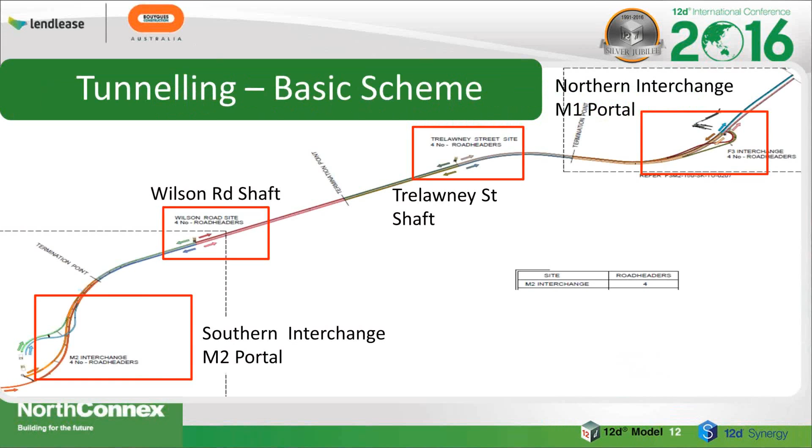It's basically a twin tunnel, 16.3 kilometres, ramps, heaps of cut and fill, and they've got 19 road headers working on it. They're doing those from 4 places where they're putting in the road headers. So it was a fantastic talk.

There's a road header, and they were using Leica's, 12D model and the tough pads, and 12D Synergy for all the data. I think even after a few months, they've already got 25,000 survey files in 12D Synergy. So it's a fantastic thing.

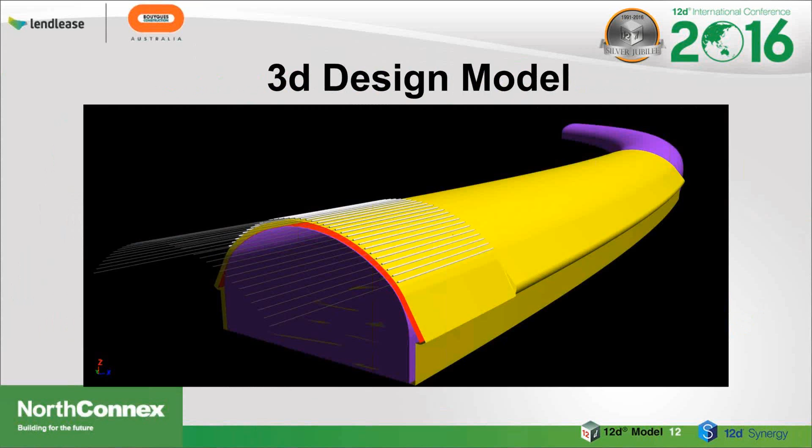What they had to do is they got the plans and things that were done, and produced 3D design models in 12D model, so they can then set them out in the field. So this is all in 12D model, and everything can be constructed from the 3D design. This is civil digital engineering in action on a decent job.

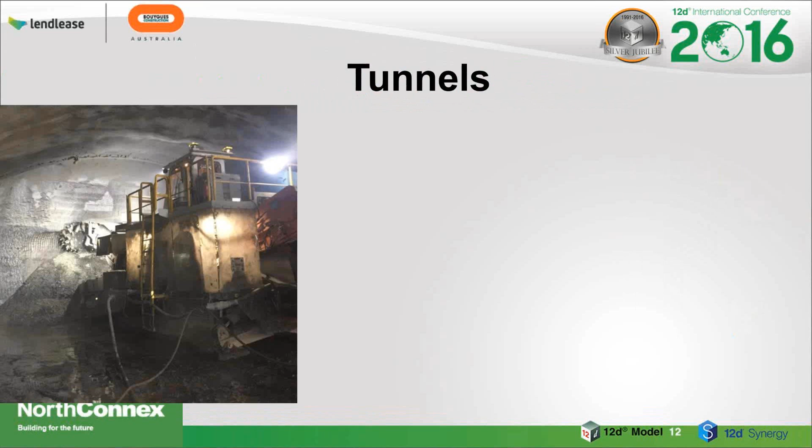So with it, there's the road headers - they've now got 13 of the 19 in action, down there starting to dig it out. So it's a very interesting talk. It's on our website if anyone would like to go through it.

So they're doing everything there, tracking all the data inside 12D Synergy. They've got full audit trails, so every single point is in there. And as they're doing it, they're getting live as-built models from the data. So it's digital engineering in action.

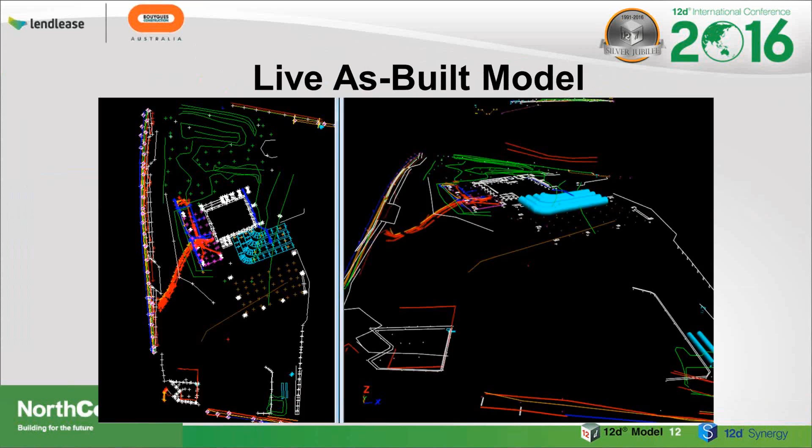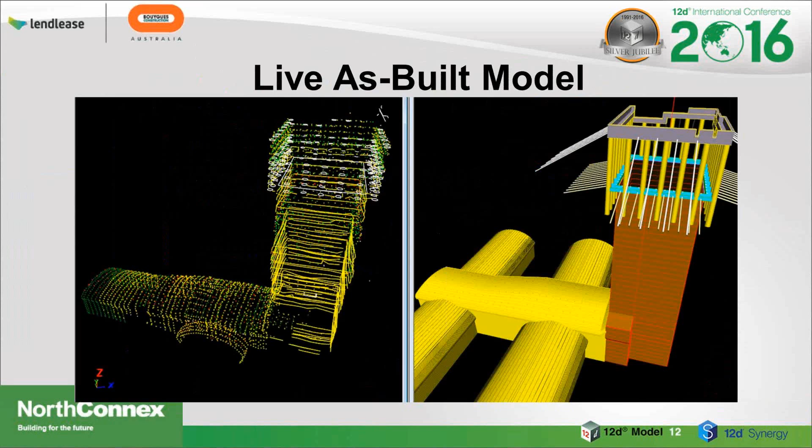On the right-hand side is the 3D model, and on the left-hand side is the as-constructed pickup as they're doing it. So this is digital engineering happening today now for everybody.

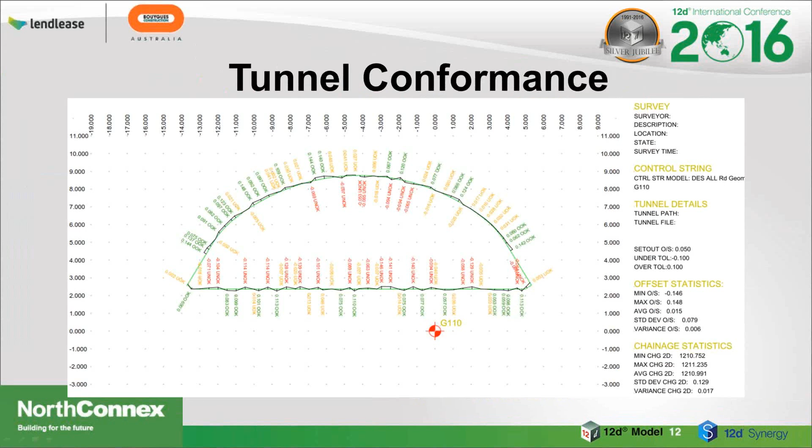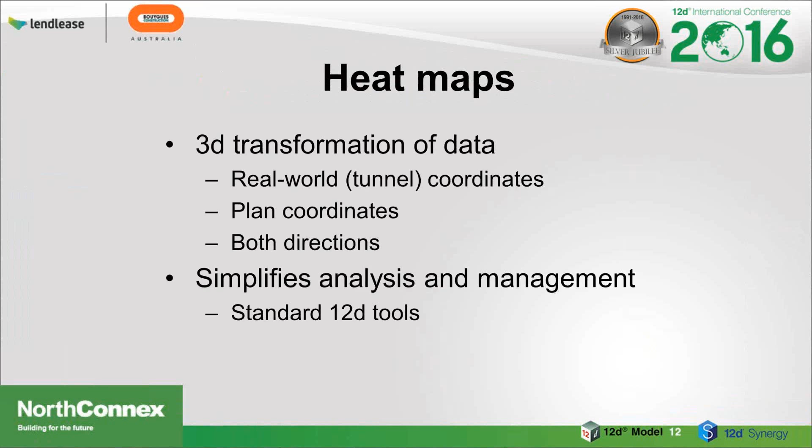They're producing tunnel conformance plots directly out of it, so they don't have to do anything by hand. There's 350,000 rock bolts which need plots done, again totally automated. There's even heat maps, transforming data and showing it on the tunnel itself, depths and things like that. It's a fantastic way of looking at data.

They're using all these techniques, and our 12D model tunnel field option is being used successfully there. They try to make it all automated. It's all live, all the staff are using the same database, so they've been able to eliminate double handling and so on.

This is digital engineering in action with 12D model and 12D Synergy. It's been a fantastic system for them that's now in action, so they can do more at the workplace rather than having to go back to an office and slow down their headers. They can easily detect clashes and problems right there in the field, and remove manual processes.

In the future, they want to expand that more and more with real-time reporting, so it can all be done in the field, and hopefully apply this technology to numerous tunnel projects they'll win in the future.

At the conference, other talks included AECOM, Arup, Aurecon, Barwon Water, Brisbane City Council, Bundaberg Council, Christchurch, Cook Costello, Dalton's, Engineering Solutions, GHD, Gold Coast Council, Queensland Transport Main Roads, SMEC, Subterra, WSP, and Parsons Brinckerhoff, all giving talks about how they're using 12D model and 12D Synergy.

We had a welcome event so everyone could get together on the Sunday night, since the conference runs Sunday, Monday, Tuesday, so they could all get to know each other and start asking questions.